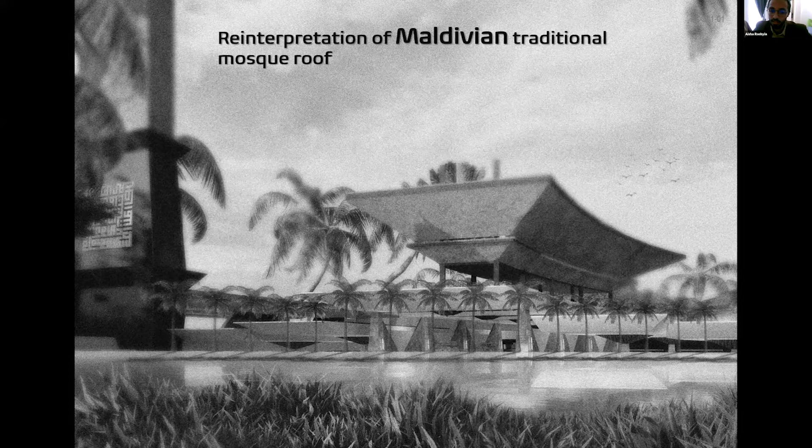The second thing, as you can see, is the shadow of the past. The idea was to bring the traditional language of the mosque, but in a modern language. So you can see the use of timber, the use of thatch and coconut and palm tree all around the site. These are the main Maldivian traditional materials that we try to employ in the design. That's why we call it the shadow of the past to the present.

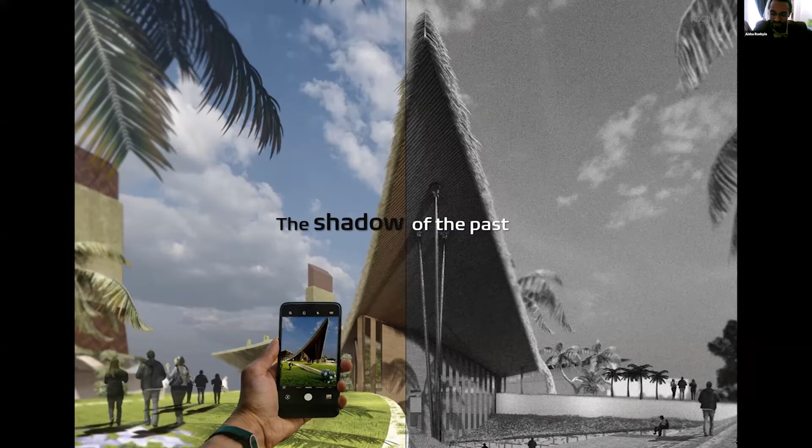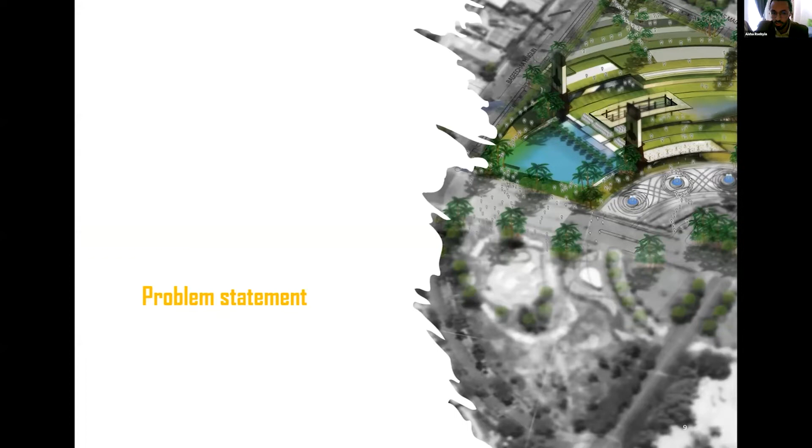So how did we start this design? Actually, we started the whole design by identifying one of the biggest issues in Maldives, like Aisha just explained. We should consider this as one of the main issues, that there is an increase in the population. At the same time, there is land shortage in Maldives. So in return, we had to find a concept inspired by this issue.

According to the United Nations Population Fund, there will be 1 million people. At the same time, we know that there is land shortage in Maldives, even though it was resolved somehow by creating Hulhumale, but it is still considered there is a land shortage in Maldives, according to the Ministry of National Planning.

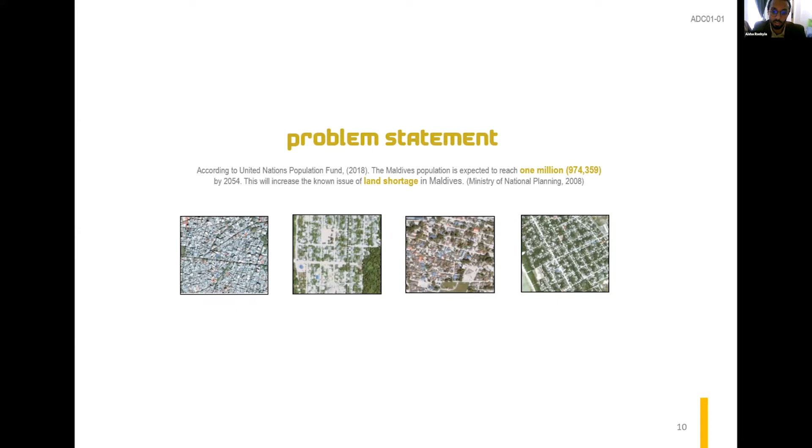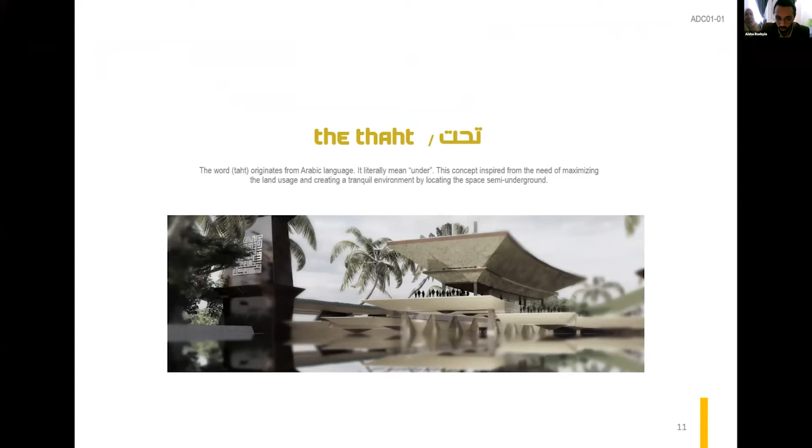So what did we do? What was the solution? The solution was the Taht. As you can see, we decided to have this concept, which is called Taht. The meaning of Taht is literally "the under," and this concept is inspired by maximizing the usage of land. It also creates a tranquil environment because it's semi-underground.

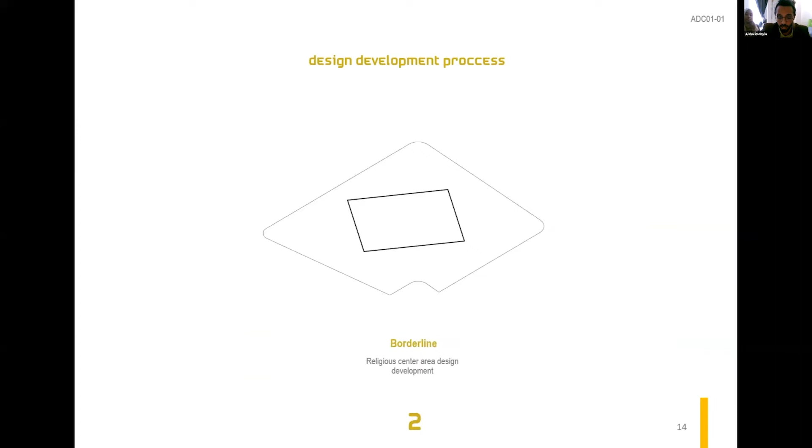So how did we develop this concept? How did we translate the Taht into a form? This is the process of the design. First, this is the site. Then this is the border line of the site. Then this is the Qibla direction of the site. And this is the existing fountain. So these are all existing things.

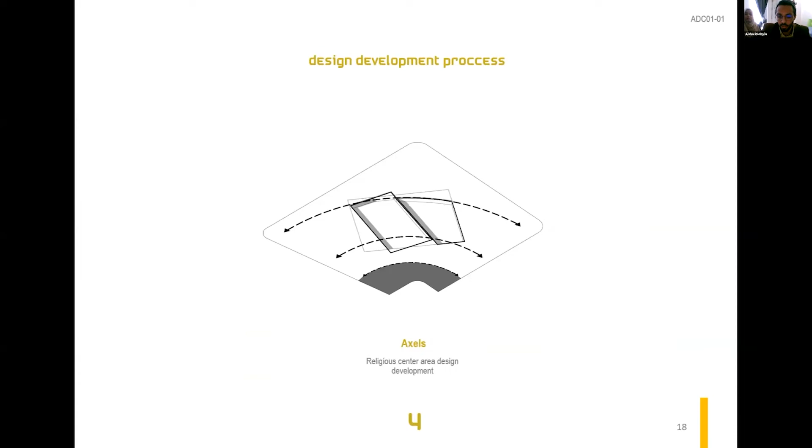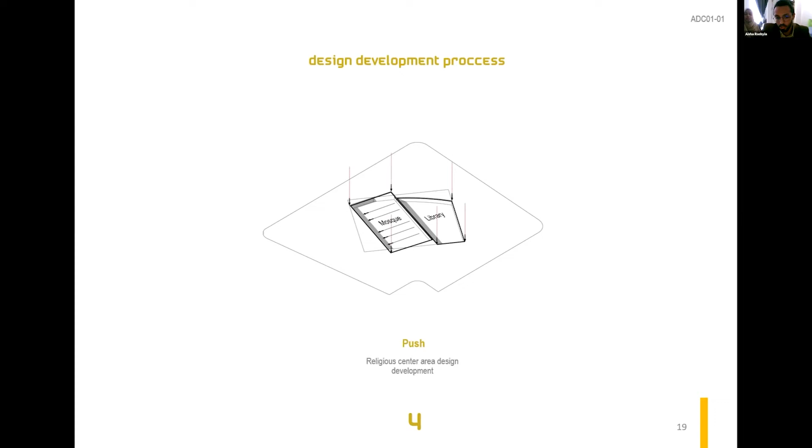We started by offsetting the lines from the fountain, and then we used those axes to shape the form of the building. Then we pushed it under, so it becomes Taht, which is under. The circular form of the building was developed based on the site language, so the language of the form is inspired by the site and the fountain.

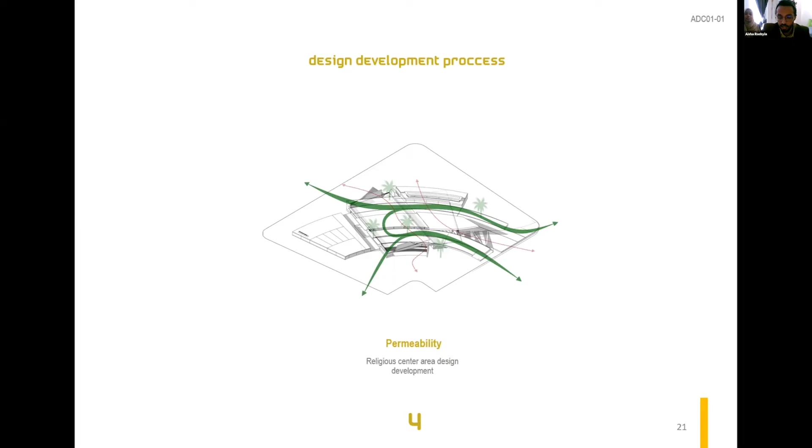And then we allowed people to walk. If you can see here, permeability: people can simply cross the site from all directions. They can go on top of the roof and go down from the other areas. So it is a very pedestrian-friendly design.

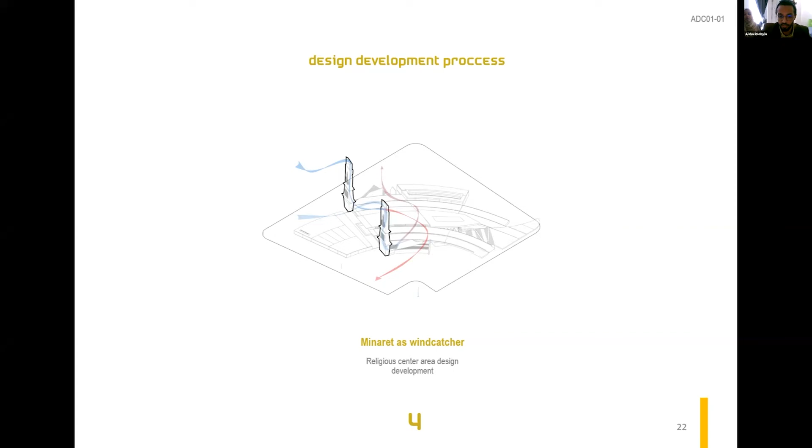And the minarets, we employed them as wind catchers to improve the comfort level and the temperature in the mosque. Even though it may be a new culture to do this, there are so many case studies that prove the effectiveness of using the minaret as a wind catcher.

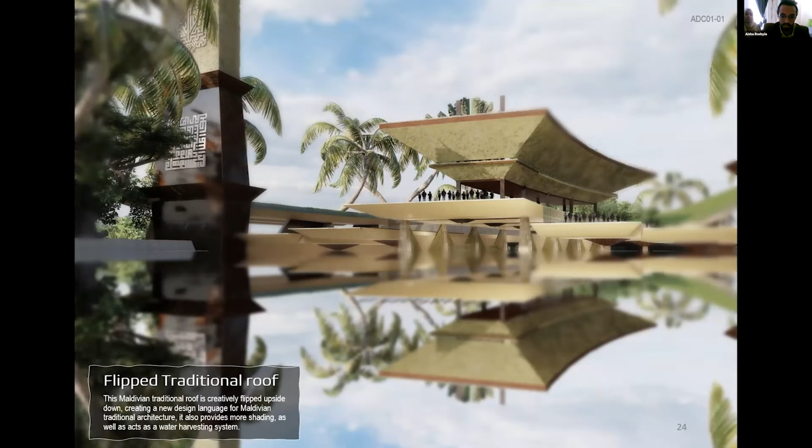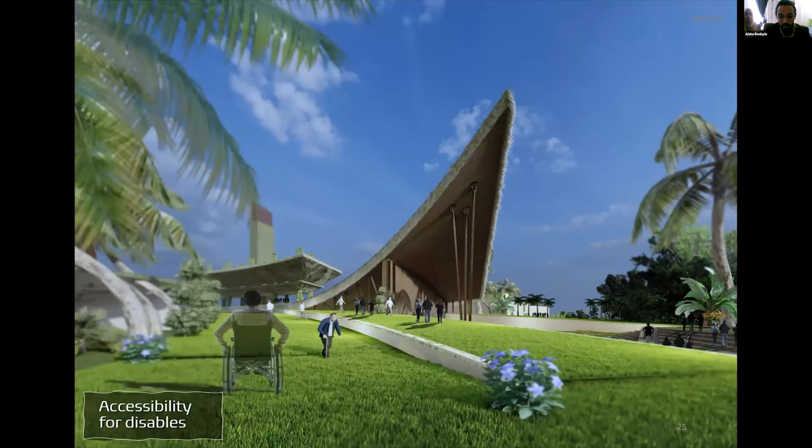So if we come to the building design, this is the building. As you can see, it is semi-sunken, semi-under, and this is the traditional flipped roof that I explained just now. On the other side of the building is the library. The library is also sunken, and there is a huge staircase, but even though it's huge, it's designed so that people can enjoy it. It is not a tight, long walk, but a walk that people can enjoy.

And at the same time, there is disabled accessibility. If you can see at this place here, even disabled people can use it to go down. It is basically for everyone to use. It's a long staircase, but it is comfortable and enjoyable.

And here also, there is space for them to go by the ramp. Usually the standard ratio for a ramp is 1 to 12, but this ramp is 1 to 16. So it is more than easy for everyone to walk on it or use a wheelchair.

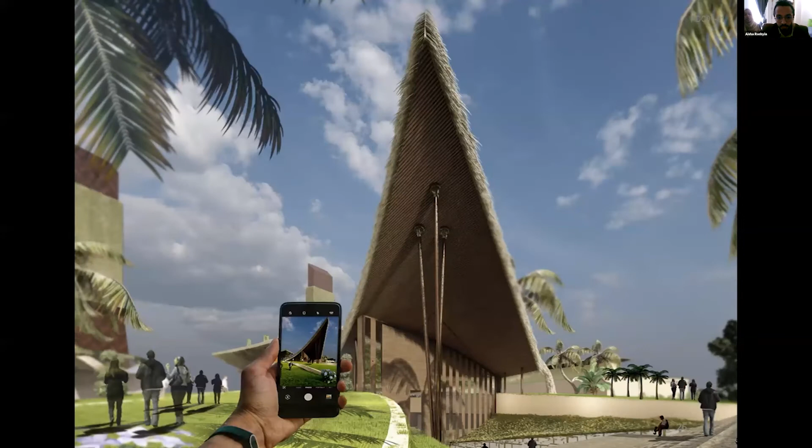This entrance can also act as an iconic entrance. People can take pictures and share them, and it can reflect Maldivian culture through the materials and through the form. The form is very expressive and welcoming. An isometric view of the mosque, I think I just showed it.

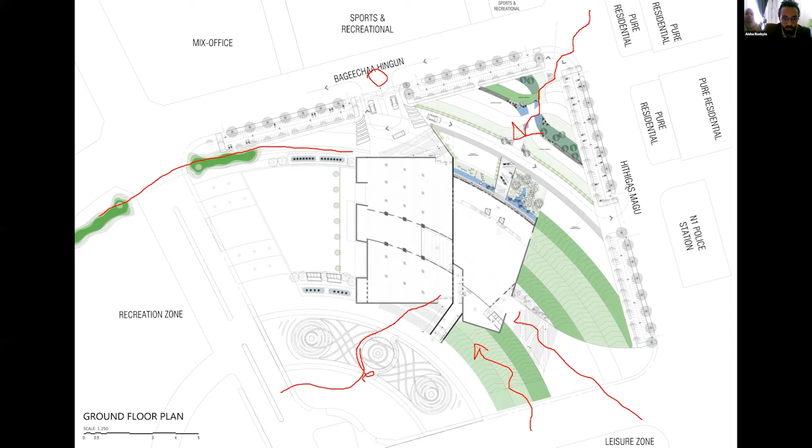People can also drop off. When they drop off here, it's very near to the prayer area. The other drop-off here is also very near; they can just drop off and go to the prayer area. And there is a huge pond in front that helps with tranquility and temperature. It can act as a passive cooling system.

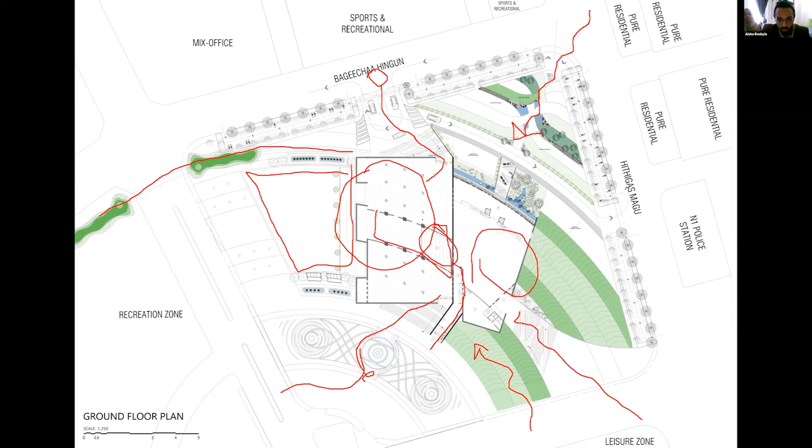So this is the mosque, and this is the library in general. This entrance is designed specially for the women. The women can stay up; they have an upper level. And this is the main prayer area, an enclosed space. I can zoom in maybe here. There is an enclosed space.

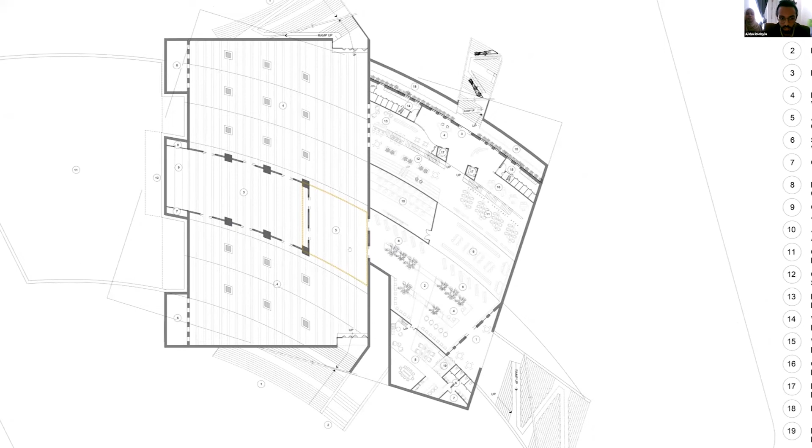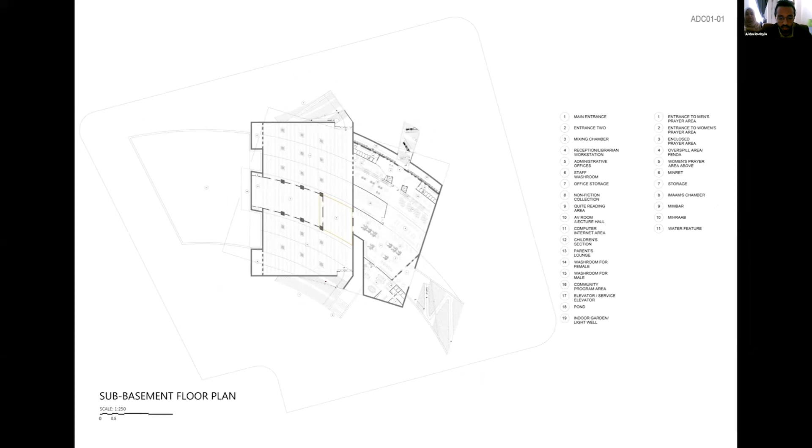This enclosed space is the only space where we are going to use aircon. For the aircon system we are using VRV, because the VRV system saves energy: it has a sensor so it can automatically shut down, and it uses less energy. So we minimize the use of aircon, and we chose the best aircon system to fit this sustainable design.

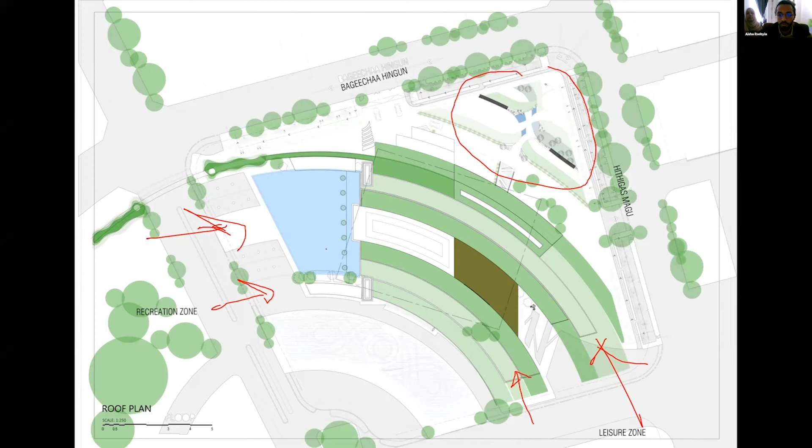So this is the roof. You can see there is also landscape design here, and it attracts people. People can simply walk from the park to this side, and from this side. Basically, it attracts everyone from around, because this is a walkable place. So we tried our best to design it from all sides to attract pedestrians into the mosque, the library, and the whole landscape.

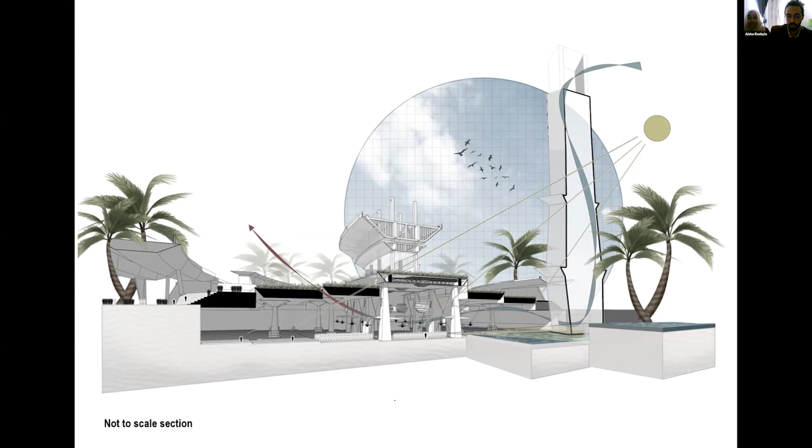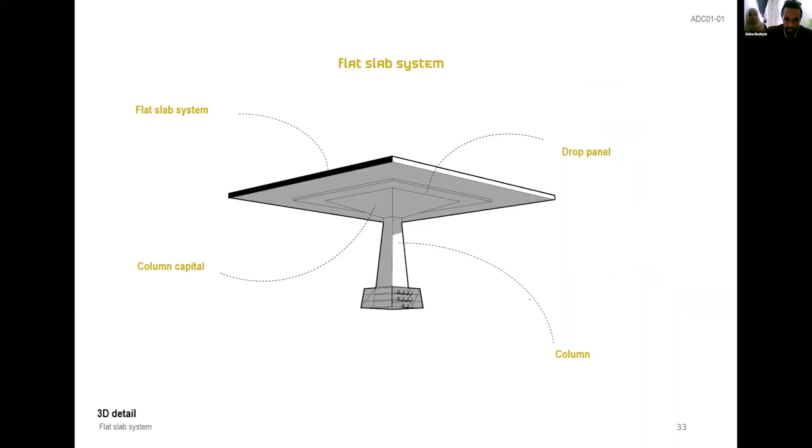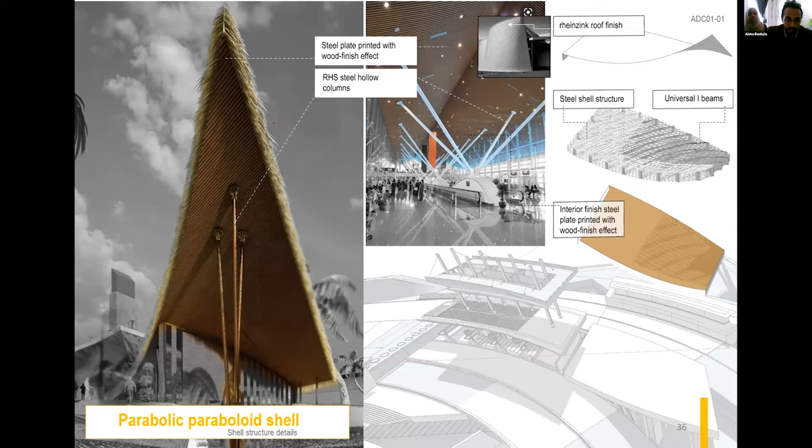Okay, so for the structure system, we just simply use this flat slab system, because we try to create more flexibility in the layout of the mosque. So the details explain all about the structure system here. It shows the arrangement of columns. It shows the arrangement of all the trusses and the structure system, the details, and we showed some existing studies here about the material and how we can bend this material into the roof. And this is also an isometric detail section.

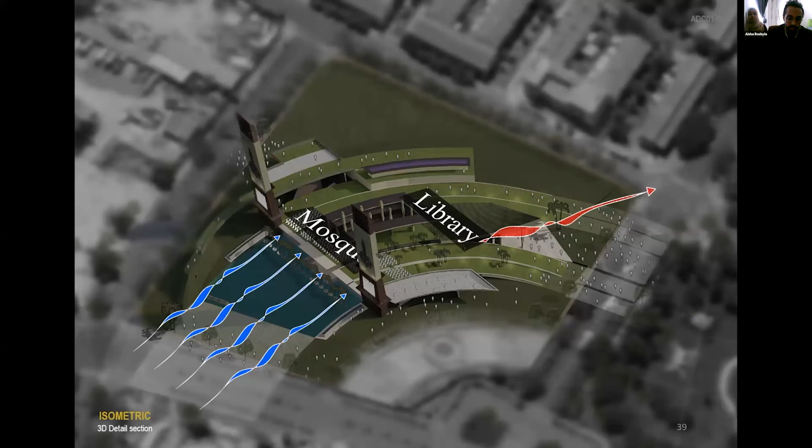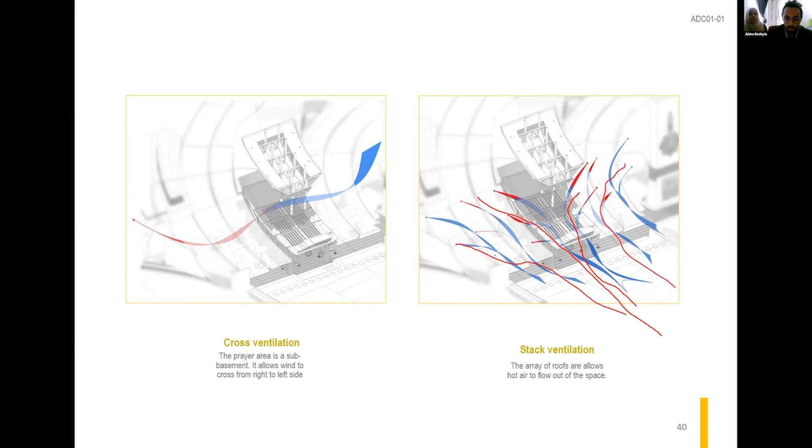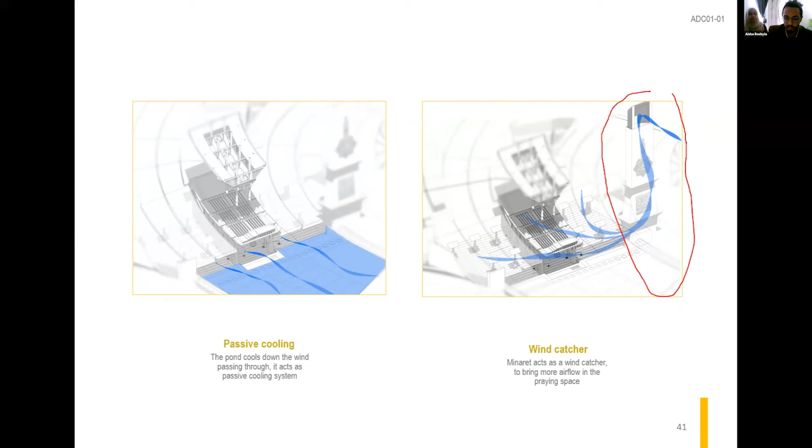And then for the building services, we also employed natural ventilation to cool down the building. There is cross ventilation in the prayer area, and there is also stack effect. See the stack effect, it works like it comes from the lake side and goes out from here. And then from this side also, it shows how the pond cools down the temperature. And also the biggest idea we have is this minaret acts as a wind catching system.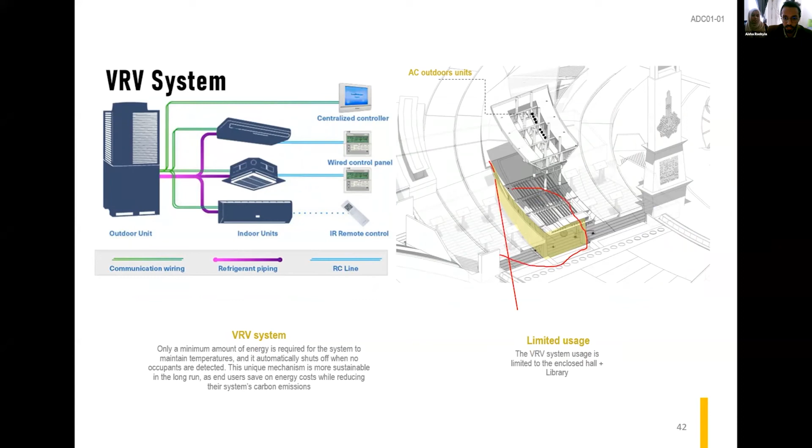And then again, the VRV system is only used for this prayer area. And then we also show how we arrange the fan system. We arrange them in a nice, beautiful way around the columns. And then we also arranged these lighting systems, and we selected the types, and we found the suppliers.

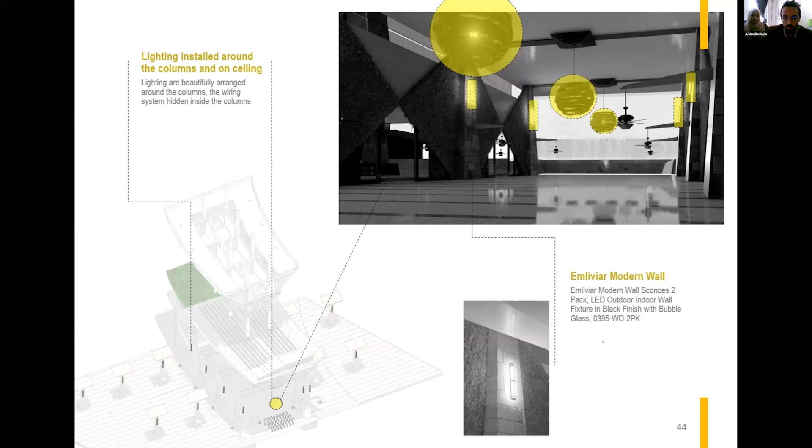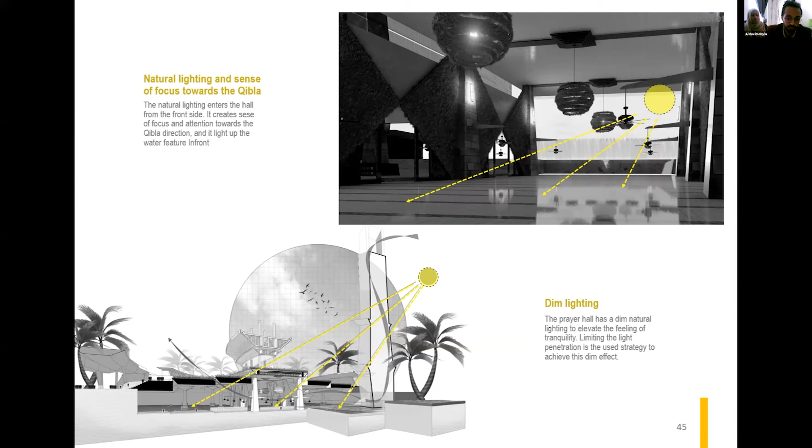At the same time, also the way we integrated the natural lighting, it was not just simply natural lighting, but we integrated the natural lighting in a way that creates focus towards the Qibla direction. So the only light that comes is from the front side of the mosque, which will create a sense of focus towards the Qibla of the mosque. And at the same time, we made it dim. So this dim effect makes the space more tranquil, according to much research.

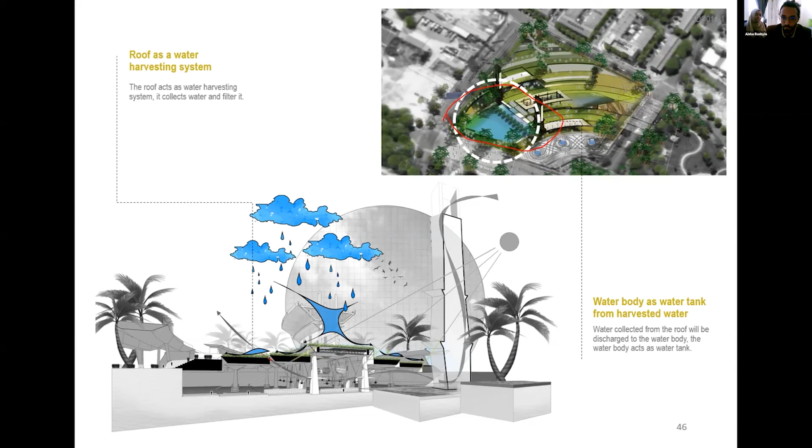And the roof also is a harvesting system. The water will be collected from the roof, and then it will be discharged to this lake. This lake acts as a storage tank. After that, it goes to the filtration room, and then it can be refiltered and pumped up to be reused for wudu or other things.

So one of the biggest ideas in this mosque is that it is also designed in a tranquil concept. So how did we achieve tranquility in this place? We did a deep study on how to design a tranquil place, and we summarized all this in these strategies. Number one, the biggest element that can help in creating a tranquil space is the integration of the water element. So we integrated the water element in two ways, in a way that we can hear the sound, and also we can see it. The sound comes from the water falling from this side. If you can see, there is water falling from this side.

And also we improved the noise level by creating a sunken prayer area. And the green roof is going to improve the noise, as we know that there are bikes all around and we need a tranquil space to pray. So the noise level. And then also the water, we have a waterfall there, a water wall. This water wall can mask the noise. When there is noise outside, it can help to mask it. So we put the water, we improve the noise level, and then the integration of natural light.

The way we put the natural light, we just allow it to enter the hall only from the front, so that we can have a dim effect. This dim effect will create a tranquil space according to many case studies and much research. At the same time, we also improve the temperature, because temperature is one of the aspects that will help in tranquility. How did we improve it? We allowed cross ventilation, we allowed stack ventilation, and also we allowed this minaret to be used as a wind catcher to improve the thermal comfort and the temperature in general.

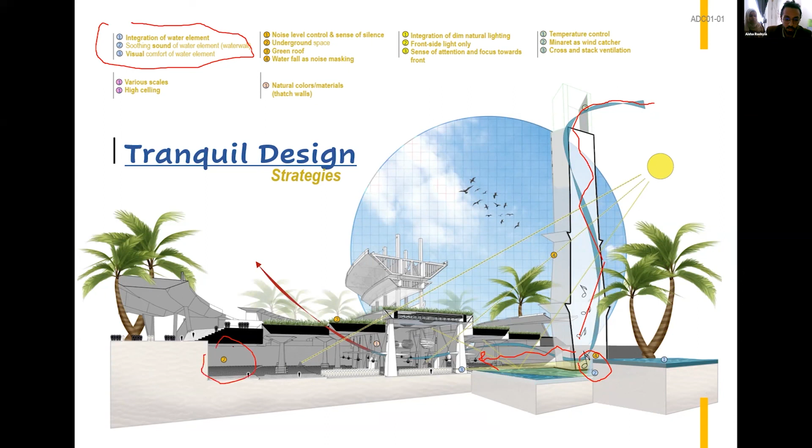And at the same time, we also used the scale to create various emotions for the people when they walk in. So they have different scales here, one scale, and another scale, and then there is a third scale, and then the